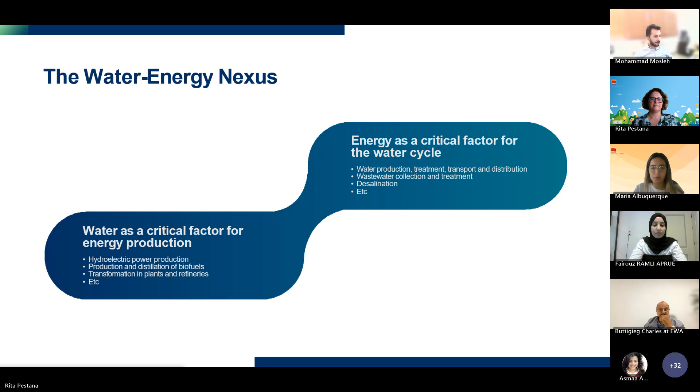So if we look now at the global situation related with the water-energy nexus, what we have is the fact that we actually have numerous factors that affect the quality, the quantity, and the variability over space and over time of the water that we have available.

Due to what? We have the effects of climate change, and in here we include not only the increase in global average temperature, but also the modification of precipitation patterns all around the globe, and as well the increase in the frequency, intensity, and impact of extreme weather events. And in here we include droughts, floods, or for example, heat waves.

Another factor that affects water is the increased consumption and competition for water. On one hand, we have a growing population. We have new economies, new sectors developing. On the other hand, we have also migration, internal migration to urban centers. So the geographical patterns of water demand are actually currently changing.

The third big factor that affects water availability is the increase in pollution. We know that according to UN Water, only around 60% of water bodies assessed in 89 countries in 2020 actually had good water quality. On the other hand, around 40% of all domestic wastewater around the globe is actually not treated properly and thrown directly into water bodies.

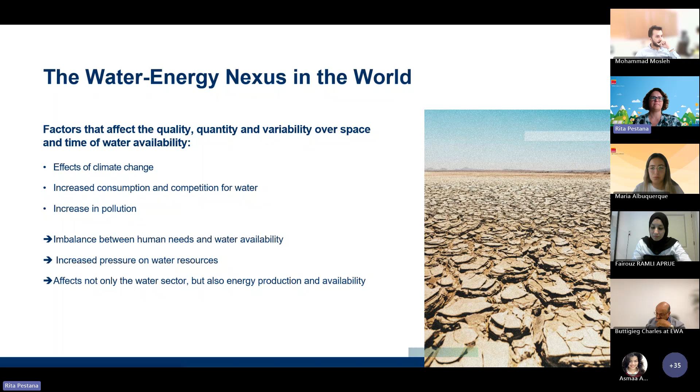If we look more specifically at the Mediterranean Basin, it is already a region that presents water scarcity at the moment. I'm talking in general about the region, not specifically any country. Usually we have long summers, which often have long drought episodes, but that then alternate with autumns or winters that have intense rainfall. And we have as well areas where groundwater depletion is already a factor, and rivers that already have low flow problems.

This adds to all the climate change effects we just talked about, to population growth, to a growing economic demand for water, and therefore a growing competition for water between different sectors, and the fact that the Mediterranean countries still strongly rely a lot on fossil fuels.

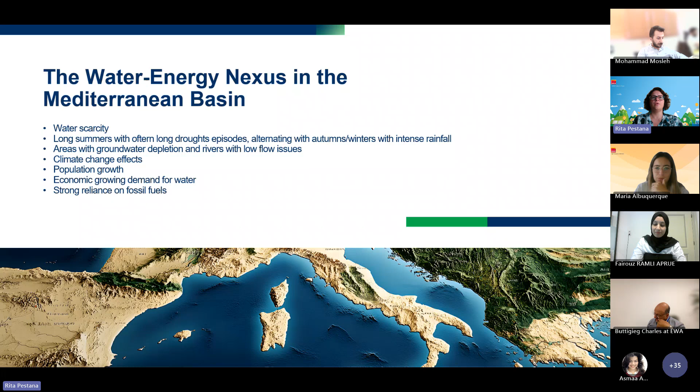Taking this context into account, we understood it as very interesting and useful to develop a methodology that would actually act on the water-energy nexus at the buildings level for the Mediterranean Basin. This methodology is named the Water-Energy Nexus Evaluation Methodology for the Mediterranean Basin, a long name.

It was developed by ADENE, the Portuguese Energy Agency, on the scope of meetMED 2. The aim is to assess and promote the adoption of measures that reduce energy and water consumption, on the scope of this water-energy nexus and the dependency between these two factors, while enhancing the resilience to climate change on Mediterranean buildings.

So what we look at in this methodology are actually three dimensions: the water efficiency dimension, the water energy nexus dimension, and the local climate adaptation dimension. When we look at the local climate adaptation dimension, we look specifically at climate risks that actually affect the production, abstraction, distribution, and use of water. So we're talking here about droughts, floods, coastal floods or riverine floods, and heat waves.

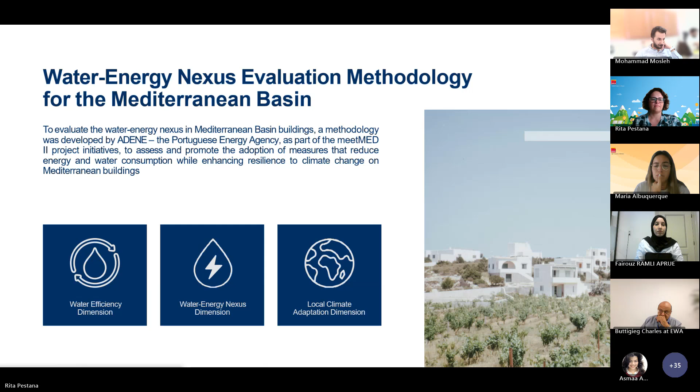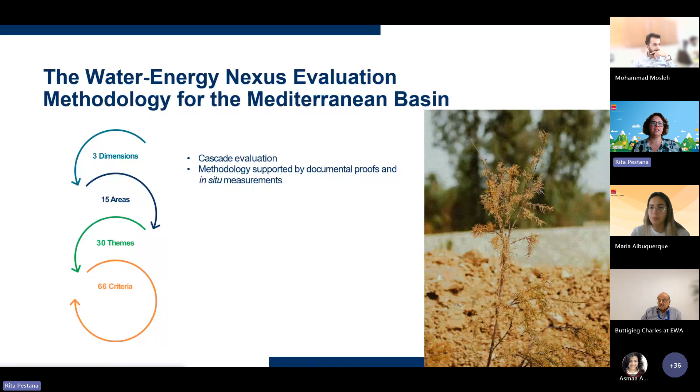To give an idea how the methodology actually works: we start with the three big dimensions - the water efficiency dimension, the water energy nexus dimension, and the climate adaptation dimension. Within each dimension, we have several areas of evaluation. Then we go into smaller themes within each area, and then within the themes to the specific criteria that are actually the questions we need to answer in order to apply the methodology. So this is a cascade type of methodology evaluation.

We go deeper into the details, and the methodology is always supported by documental proofs and in situ measurements. By documental proofs, we mean technical documentation, energy labels, proofs of purchase of all the equipment, fixtures, or systems related with the production, distribution, and uses of water within the building. And in situ measurements always happen when the methodology is applied to a building that is in use, constructed, and it can be measurements or photographs of certain features of the equipment. So we always need documental proofs and measurements to actually apply the methodology.

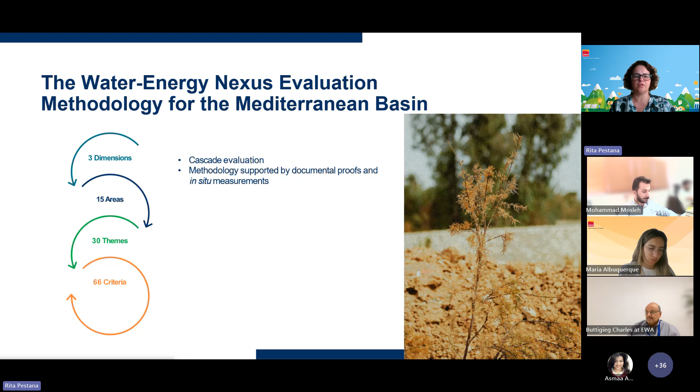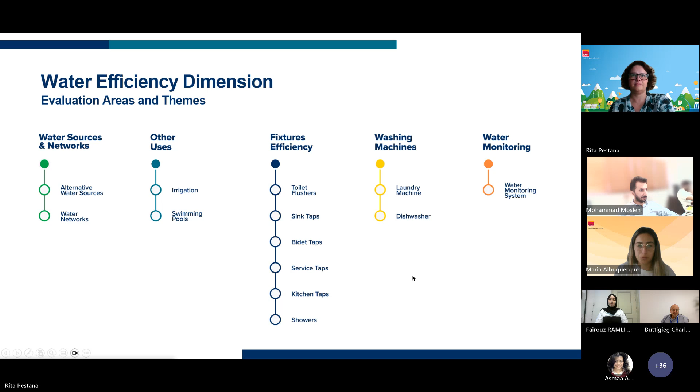Taking a look now at the water energy nexus dimension, it has a similar structure in terms of areas - similar equivalent areas to water efficiency. But here we're trying to assess the energy that is related to water uses. So, for example, in water sources and networks, we're looking at pumps that help with the circulation, distribution and use of water, and also at whether there are renewable or alternative sources of water and how they are supplied.

Is it using an electric pump? Is it using gravity - a system that allows your water to flow without spending energy? So we look at this type of point.

The same for irrigation: we look at electric or non-existing pumps used for irrigation. If a swimming pool exists, we look at energy and maintenance, and at specific parameters related to indoor swimming pools. Concerning fixtures, we look at the pressure and head loss of the building's network.

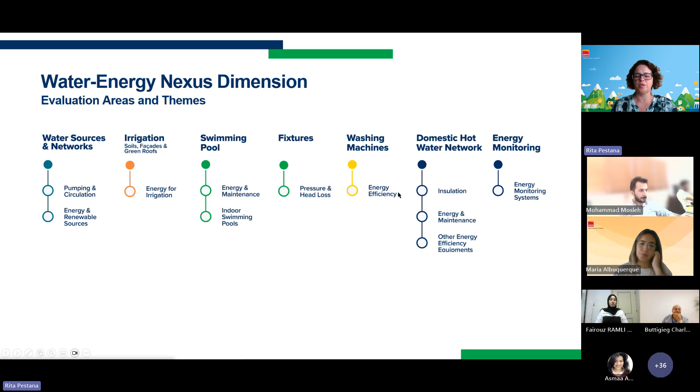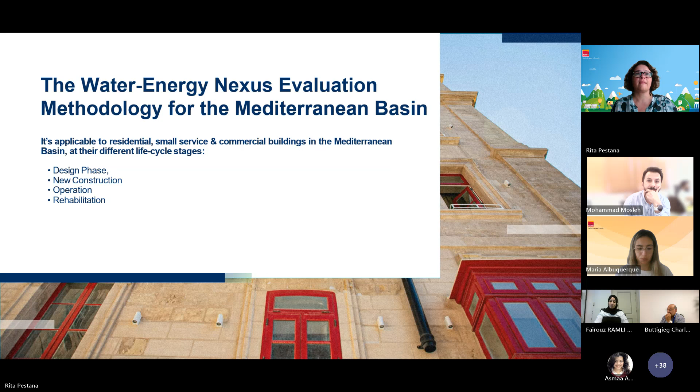So when we apply the methodology, we'll have scores and classifications at the end. These scores and classifications reflect the efficiency of the building on the 3 dimensions, and also a global efficiency classification.

So how does it work? We have 66 questions, so we answer all these questions, and each question has a weight and will give you some score that's added to the total score of the dimension. Each dimension will have a value between 0 and 100.

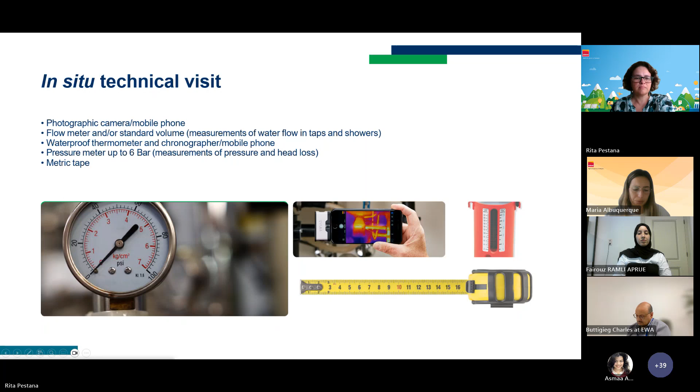Okay, just to have a better visualization of the methodology, I'll show you some prints of the evaluation matrix. So first, as I mentioned before, you need to fill in the matrix with the current situation of the building.

You'll also have tables to fill in technical data of fixtures and any other water-related equipment and systems existing in the building. This could be different types of electric pumps, water pumps, circulation pumps, or the model and characteristics of washing machines, etc., if the information exists.

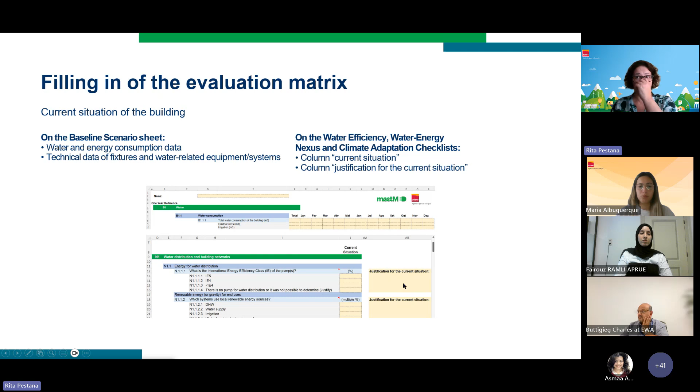You'll answer the column 'current situation,' and then put some justification for what you answered in this column, justification for the current situation.

After doing that, you'll select a maximum of two to three infrastructural improvement measures for each of the dimensions, and then introduce them on the checklist.

So how do you do that? You select the measures and look at the column 'situation after improvement measures,' and register the ideal situation here—as if the building already had the improvement measure implemented. You put some notes on the observations about the proposed improvement measures column, just to justify why you selected it.

And why do you do this? Because you'll have another sheet in the Excel file, the summary of results, where you can see all the scores and all the classifications for the building.

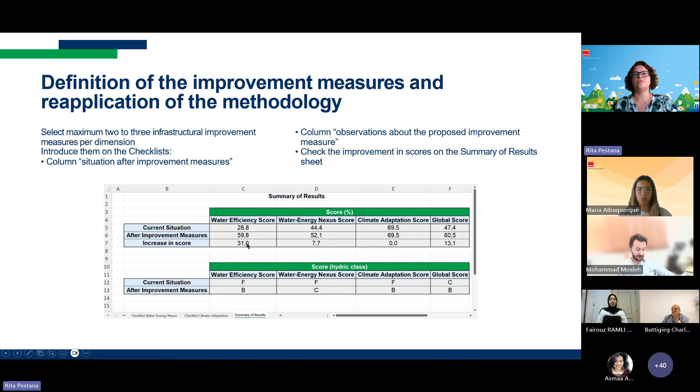So you can actually play around with the checklists, trying to select different sets of improvement measures that you think are adjusted to the building and that can improve its efficiency. You can check these tables to see how much the increase in score is for each dimension and for each selected set.

The bigger the increase in score, the higher the increase in efficiency in each of the dimensions. So this is the way to fill in and apply the methodology, and to help guide you to choose the best set of improvement measures for the building.

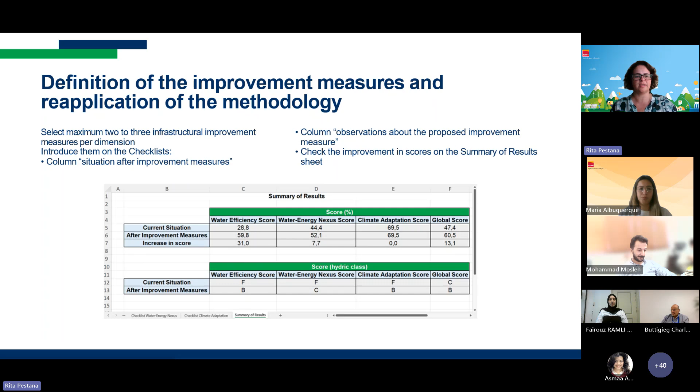The next speakers will give their results and experience just after my talk. What happened is they applied the methodology and gave us feedback, and according to it and the specific contexts, the methodology was adapted and adjusted.

And while doing this, we made a compilation of all the recommended improvement measures for all the different dimensions.

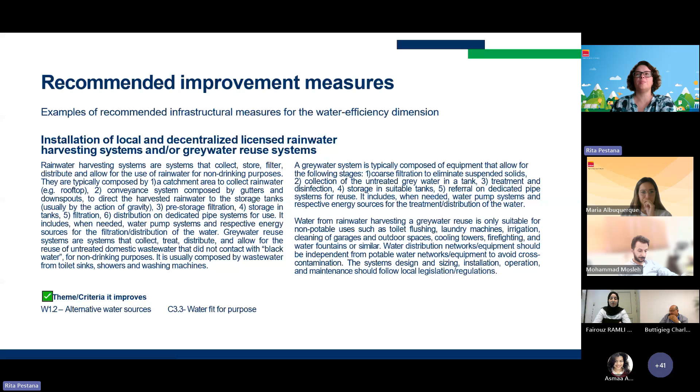And recommendations on the conditions to actually implement the measure. Concerning the methodology, you also have information on which themes or criteria the implementation of this specific improvement measure will improve. For example, installation of local decentralized rainwater harvesting or grey water reuse systems will act on the water efficiency dimension, on the alternative water sources theme, as well as on the climate adaptation dimension, on water fit for purpose. So you have information on which dimensions, themes and criteria each improvement measure will act on.

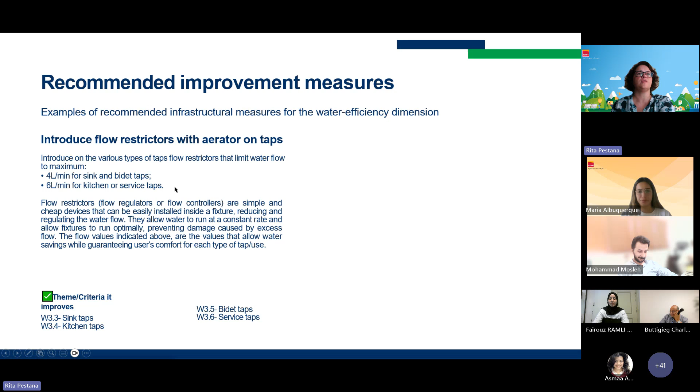Another example of a recommended measure for the water efficiency dimension is the introduction of flow restrictors with aerators on taps. This is a simple and inexpensive measure that will help limit water flow to maximum recommended values.

Another example, for the Water-Energy Nexus dimension, is the implementation of efficient water elevation or circulation pumps for adequate and stable pressure head loss values on the water network. Again, a smaller description, with the themes and criteria it directly improves.

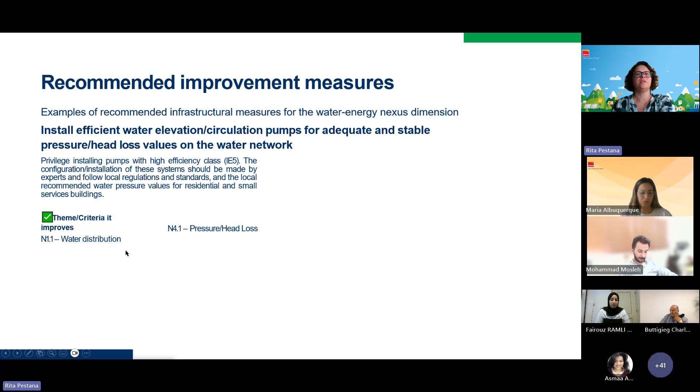Another one for the Water-Energy Nexus dimension would be to privilege gravity and renewable energy sources concerning water distribution, instead of using active systems that use non-renewable energy.

Two examples for the climate adaptation dimension would be the introduction of blue infrastructures in outside gardens, such as rain gardens, or the increase of permeable areas and placement of permeable flooring outside.

This development of the methodology was possible because there was implementation and testing on pilot buildings in Morocco, Jordan, and Algeria. I'll go quickly through this as the next speaker will talk more specifically about it. This is the public building in Jordan.

They've applied the methodology on a primary school. I will not go into the details, just let you know the logic of the methodology. The baseline scenario made in the beginning was to see which building characteristics and technical characteristics were related to water.

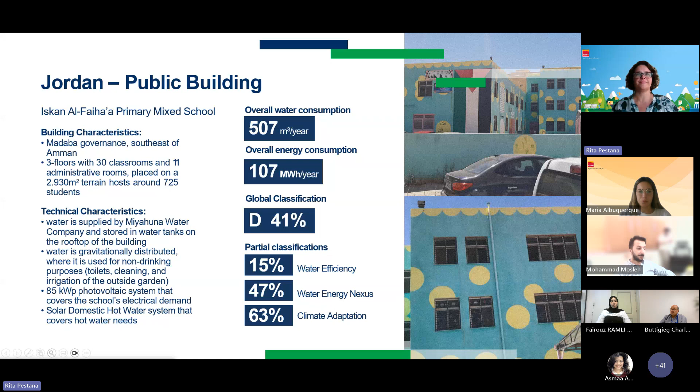Then a set of improvement measures were defined, with the main benefits identified as well, and the monitoring strategy also defined.

By reapplying the methodology, introducing the selected improvement measures on the Excel file, we had an increased global classification and new partial classifications, which were obviously higher than the ones for the current situation.

Our colleague Mosleh will soon explain better the state of the situation at the moment, but they are now implementing the improvement measures and will soon start monitoring.

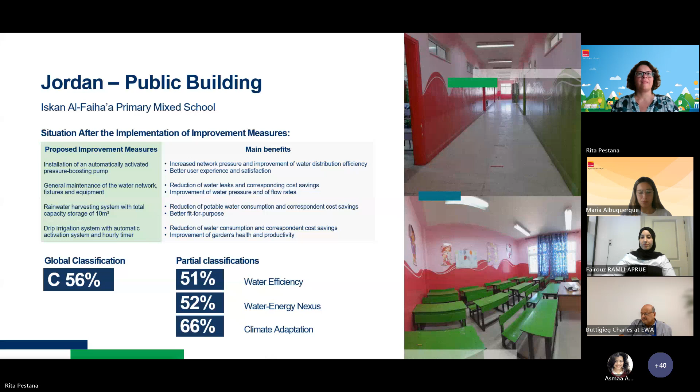I will talk to you, as an example, about one collaboration we had within meetMED 2 with another activity, activity 3.2.2, reaching twinning agreements and implementing study tours for city officers, which allowed us to give cities the opportunity to test and implement the methodology.

One of the cities that did this was Palmela, in Portugal. One of the buildings where they applied the methodology was the Poceirão Cultural Center.

They analyzed the building characteristics and technical characteristics. In this case, the building uses are solely 8 toilets and 1 kitchen. It's a building used for cultural activities and presentations, and the relevant water use equipment is solely the electric domestic water heater.

For the current situation, they made the overall water and energy consumption and applied the methodology, resulting in a global classification of C, 47%, with 29% on the water efficiency dimension, 44% on the water-energy nexus dimension, and 69% on the climate adaptation dimension.

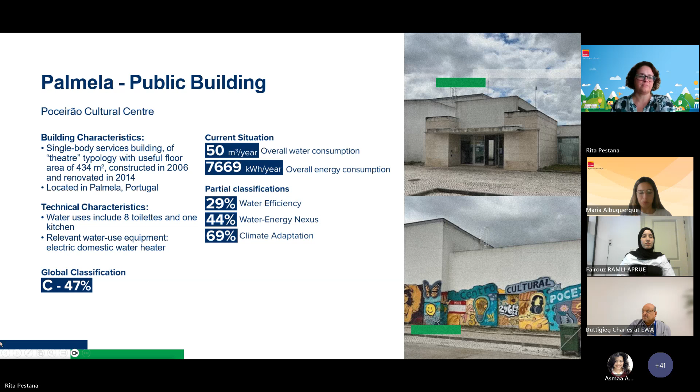So they've selected and tested on the Excel file different sets of improvement measures. These were the ones that were selected. In the case of this collaboration with the Twinning activity of meetMED 2, there's no actual implementation of the

equipment or systems on the building, just a test to see what could be the priorities if in the future there's some rehabilitation of the building or equipment. So they've selected 5 improvement measures. One of them, for example, was replacing the existing water meter with a new one that helps record daily consumption data and has an alert system to better monitor the use of water and easily detect any water leak. They've also decided on replacing taps, showers, toilet flushers and other fixtures in bathrooms and kitchens with more efficient ones with lower flow rates and aerators to limit the flow, and the installation of a rainwater harvesting system, for example.

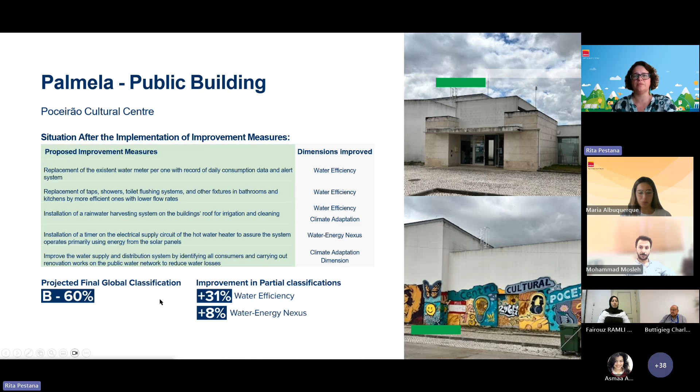So who can apply the methodology? Actually, the methodology can be applied by any energy or water specialist, as well as technical experts from energy and water agencies or from municipal, local, and regional authorities.

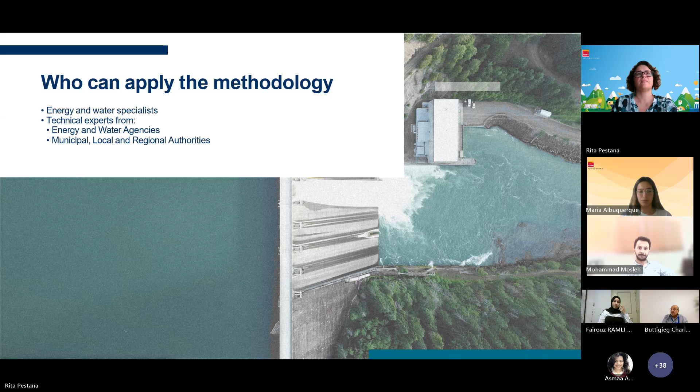I just would like to let you know about this deliverable that will soon be available on the meetMED website. That's the Green Guide for Buildings Water Energy Nexus. It gives you contextualization of the water energy nexus in the Mediterranean region, explains the development and functioning of the methodology, and includes a compilation of the most common and recommended water energy nexus improvement measures defined and compiled within this work.

Then we'll have a section on the application of the methodology in the Mediterranean countries, with pilot buildings from Jordan, Algeria, Morocco, and Palmela. Just to let you know, from the compilation we made, we identified 16 measures for water efficiency, 10 for water-energy nexus, 3 for the climate adaptation dimension, and a set of 8 behavioral measures developed within the scope of this activity, helping to develop material that was applied just some days ago in Algeria and Jordan in school campaigns.

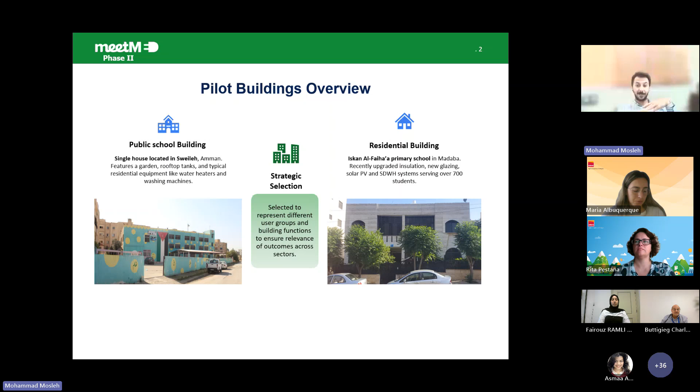These two buildings were selected to reflect typical water and energy use patterns in Jordan, one from the residential sector and one from the public services sector. The selection was made according to agreed criteria, including building type, data availability, accessibility, and improvement potential, which made them ideal for applying the methodology and testing it under real operating conditions.

To fill out the tool, we needed a combination of field measurements, utility data, and desktop research. First, we collected 12 months of electricity and water bills for each building to establish the baseline. Then we measured flow rates at taps and showers using a simple method with a bucket and a watch, and used a manual pressure gauge to measure pressure at key points across the internal network. We also did a visual inspection of fixtures and internal piping to identify leaks, inefficiencies, or damaged components, and recorded technical specs of equipment like water heaters, tanks, and pumps, mostly from the nameplates. Finally, for the climate adaptation part of the tool, we relied on desktop research from national strategies and official reports to identify risks like heat waves and water scarcity that could affect building performance.

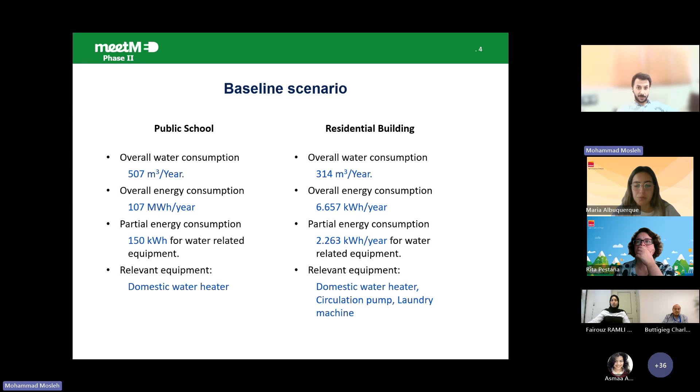Based on the assessment and the tool's results, we selected and implemented a set of tailored measures in the public and residential buildings. For the public school, we started by installing a booster pump, which solved the low pressure issue in the upper floors, especially the second floor classrooms. We also set up a drip irrigation system with an automatic timer to replace manual watering, improving efficiency and reducing water waste in the garden area. In parallel, we conducted maintenance on the internal water network, repaired some minor leaks, and added tap aerators on several fixtures to reduce flow without affecting performance.

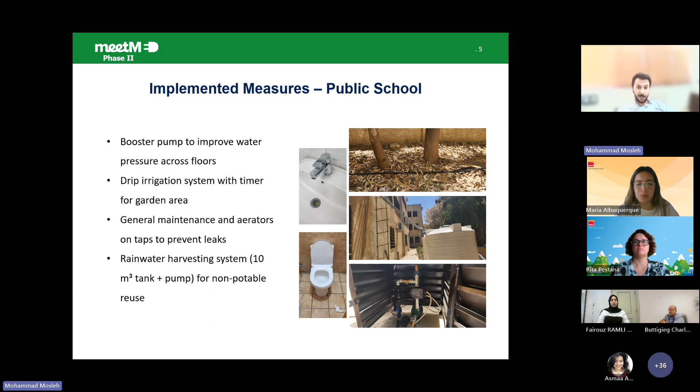Finally, we installed a rainwater harvesting system, including a 10 cubic meter tank divided into two tanks, a filtration unit, and a pump to supply non-potable water mainly for irrigation. All these measures have already been implemented at the school, and you can see a few photos here of the actual systems in place.

In the residential building, we selected three practical measures tailored to the size and needs of the household. First, we installed a solar domestic water heater with a capacity of about 200 liters, to replace the electrical heater and reduce electricity consumption related to water use. Second, we introduced a drip irrigation system with a simple timer, as we did in the public school, helping improve water management for the small garden area and reduce manual watering. Finally, we added tap aerators to the kitchen and bathroom taps, a low-cost measure that reduced flow rates without compromising user comfort.

It should be noted that these measures were selected based on feasibility, cost effectiveness, and their expected contribution to improving the building's water energy performance. So here's some results showing before and after in school.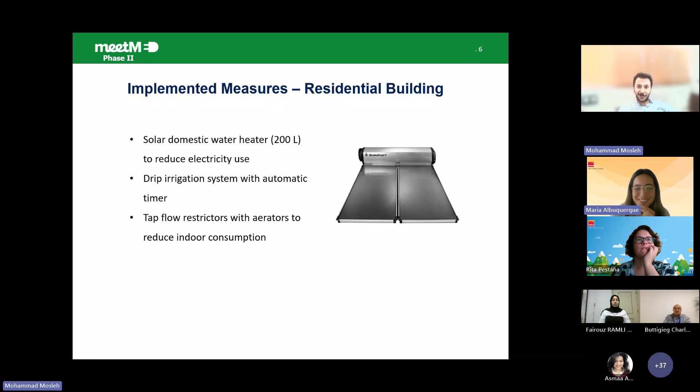Okay, here's the residential, I guess I mixed them up. I'm not sure if it's turning... Now we are seeing the PowerPoint. Just wanted to make sure we are saying the right figures. So again for the public school, where is it? Can you see it or not? Right now we are not seeing the PowerPoint. Just give me a minute. Can I stop share and just do again? Yes, share again. Laptop issues. So can you see it now? Not yet, I don't know if it's loading. Okay, what about now? Yeah, now we are seeing it.

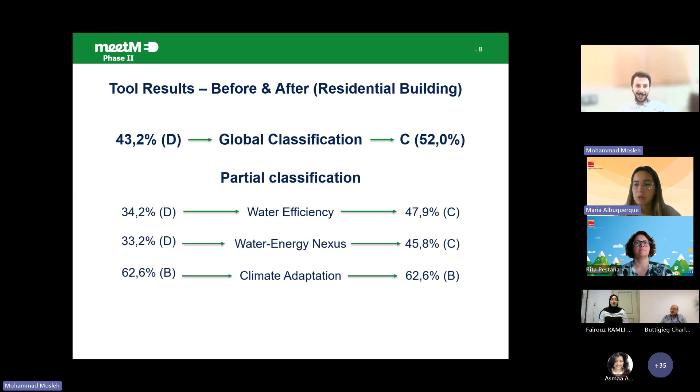I still have the same issue, it doesn't move, sorry my laptop needs some... It's okay if you think it's good to stop sharing and start sharing again, if you prefer. Okay, it can help. Can you see it now? Not yet, probably still loading. Old laptops. It's normal, we have the facility to do webinars but technical problems are always present. Thank you for your patience.

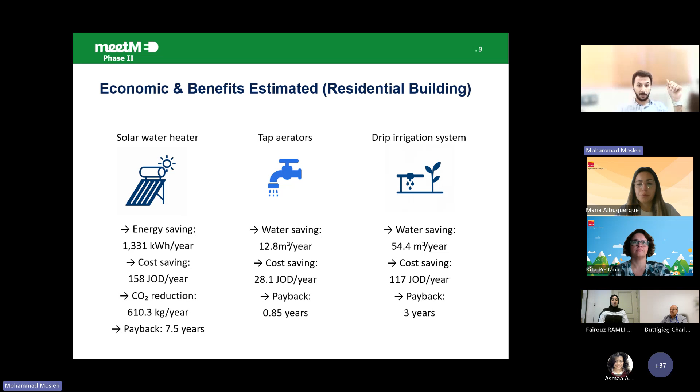Yes, okay. And the tap aerators, through a low-cost measure, still save around 13 cubic meters per year with a very short payback of less than a year, about 0.85 years. In the public school, the drip irrigation system and the network maintenance with aerators led to combined savings of over 170 cubic meters per year, with a payback ranging from 1 to 5 years. The rainwater harvesting system, while beneficial, has a longer payback, about 24 years, but it adds value in terms of resilience and reuse.

Overall, these numbers helped us build a clear picture of the economic and environmental benefits, and strengthened the case for wider adoption.

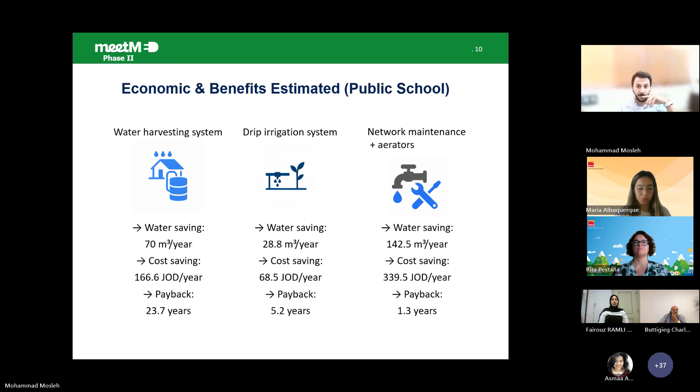So last but not least, I would say that last week we conducted an awareness campaign at Sampayha Primary School as part of this activity. The campaign focused on basic water and energy conservation practices, as well as introducing the Water-Energy Nexus concept in a simplified way for primary students.

We reached more than 500 students in addition to teachers and staff. And I'm glad to share with you that we also received very good positive feedback from the administration and the Directorate of Education in Madaba, which expressed strong interest in expanding this kind of initiative in the near future.

So please allow me to thank Asma for her great support and collaboration, and our colleagues in EWA for their huge efforts preparing the awareness materials. Their efforts actually made it accessible, fun, and very impactful. This experience really highlighted the importance of pairing technical interventions with clear communication and education, especially when working in schools.

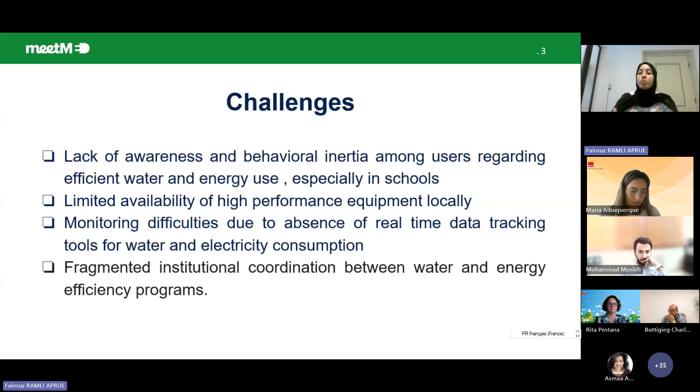Also, one of the main challenges we encountered during our work was the fragmented institutional coordination between water and energy efficiency programs. It's common that the energy sector works on energy efficiency and energy transition, while the water sector works on water separately. Thanks to the methodology led by ADENE and exchanging experience with Jordan, Morocco and other countries, we were able to highlight the importance of the Water-Energy Nexus.

First of all, we set objectives for this project, such as applying the Water-Energy Nexus approach to foster cross-sectoral synergy and renovation efforts with other actors, also to reduce water and energy consumption using integrated and efficient systems, and to promote educational engagement.

Building a culture of sustainability in schools and other public buildings, because I believe this kind of project is not only about the technical part, but also about building ownership and responsibility among the users, and contributing to our climate action goals through tangible improvements in resource efficiency.

Well, I will start with the public building, which is a school in Boumerdès, Algeria. Its land area is about 1,200 meters. It's an old school with double brick walls, and conversely to the Jordanian pilot building, our pilot building was poor in energy efficiency measures.

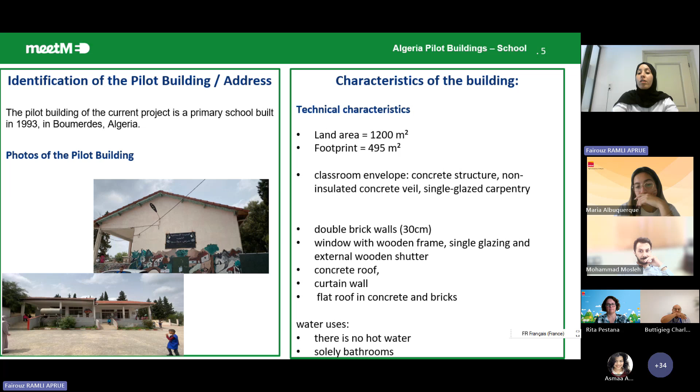So we started with water efficiency measurements at the school, and we ended up with energy measurements too. It was an opportunity actually, because when we started work, there was a renovation project for this building, and we had a chance to talk with the company and the municipality about how important it is to integrate these measurements—not only for the water-energy nexus led by the methodology, but also by improving the double glazing and the insulation, and leading a communication campaign to ensure long-term pilot building sustainability.

Baseline scenario of this school: overall water consumption was 37.3 cubic meters per month, and overall energy consumption was 2,294 kilowatt hours per month.

It's a kind of small school, but it's important for the area where we analyzed it, because it's the only school in that area, in a small town in Boumerdès. So it was a very important school to the municipality.

For the methodology highlights, the global classification was 10.1%, grade F, showing how poor the energy and water efficiency was in that school. For the partial classification: water efficiency was 16.3%, grade E; water-energy nexus was 3.7%, grade F; and climate adaptation was 10%, grade F.

After the measurements were selected for the school—just to highlight that there were a lot of measurements selected by the methodology with several impacts—we tried to choose impactful, low-cost, high-impact measurements available according to the activity, but we kept a long-term action plan for the coming months with the municipalities.

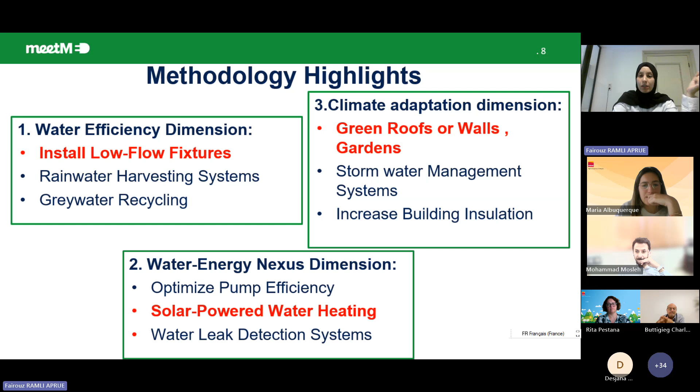For the water-energy nexus dimension, we selected solar powered water heating for the school. It wasn't only about equipment installed on the roof, but something that could have an educational impact, essential for the children, yes.

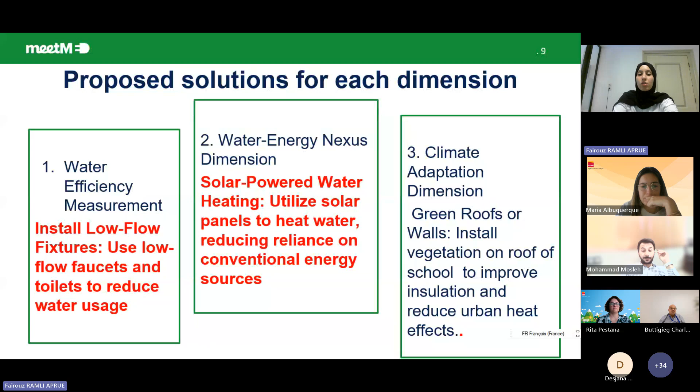The proposed solution for each dimension, as I already mentioned, is low flow fixtures, a solar water heater, and more gardens. These are real photos of the school where we installed the solar water heater and the two types of low flow fixtures.

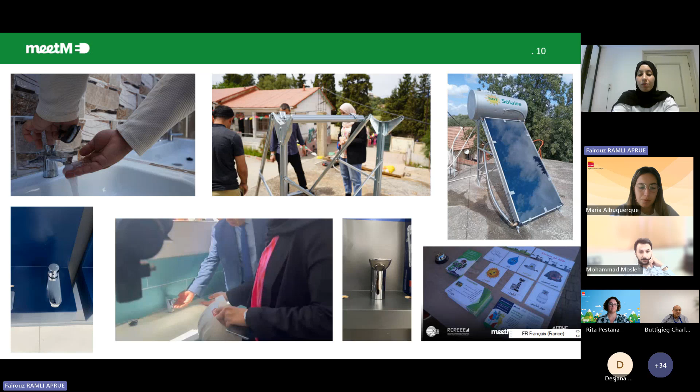We selected one temporizer with less than 10 seconds, to raise awareness among users that water has its time—it's not for all the time. The other one used infrared, so water can be used only when needed. So it was really selective equipment, not only for the technical part, but also for raising awareness.

We had this opportunity of the Green Day in collaboration with RCREEE, ESMA, ADENE and EWA, not only for the teachers and staff and pupils, but also in presence of all the municipality stakeholders, the direction of energy, direction of education, and different actors like the National Agency of Water and National Agency of Recycling, to have all these actors of this thematic for water energy efficiency. We had the opportunity to explain our application of the methodology led by ADENE, and also to raise awareness and achieve behavioral improvement through interactive action and sessions with all the users.

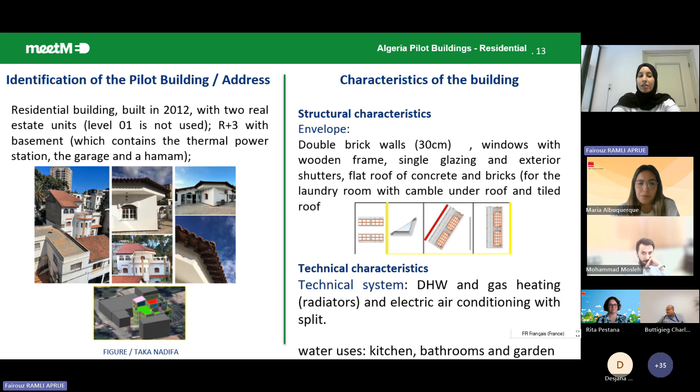For the second pilot building, it was a private building built in 2012 with 3 floors, also double brick walls, single glazing. It wasn't that much energy efficient. We didn't have that many energy efficiency measures, but as I already said, it was the opportunity to start work from the beginning and see the impact.

Of the methodology, overall water consumption was 16 cubic meters per month. Overall energy consumption was 135 kilowatt hour per month. Partial energy consumption for water-related equipment was 35 kilowatt hour per month. The relevant equipment related to water use was the laundry, the pumping, and several other equipment that you can find in the guidebook.

The methodology highlights that we had the global classification 18.5% E. For partial classification, water efficiency was 23.1% E, water energy nexus 12.2% F, and climate adaptation was 20% E.

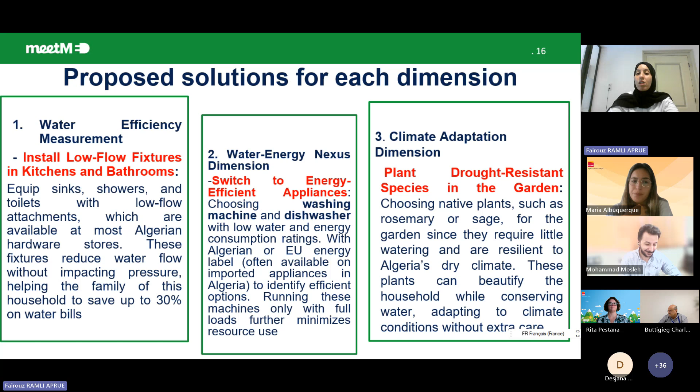For the proposed solution for each dimension, as I already mentioned, the selected measures were chosen according to the timeline of the activity, favoring low cost, high impact measures, but we also had a long-term action plan for further improvement. We installed low flow fixtures in kitchens and bathrooms, switched to energy efficient appliances like washing machines and dishwashers, and for climate adaptation, we planted drought-resistant species in the gardens.

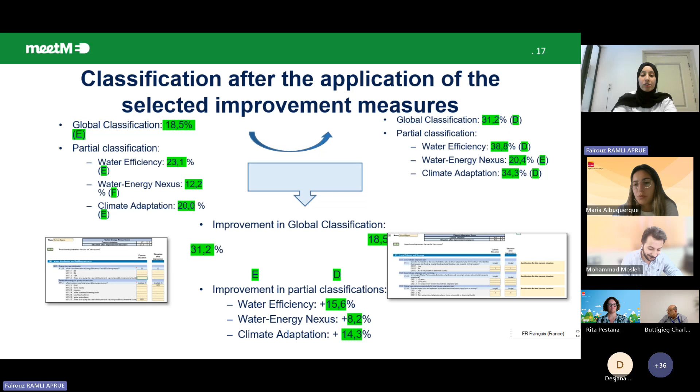We had improvements of plus 15.6% for water efficiency, plus 8.2% for water energy nexus, and plus 14.3% for climate adaptation. The benefits of the application of the methodology and all the work done during this month - not to bother you with technical details, but I will describe it briefly.

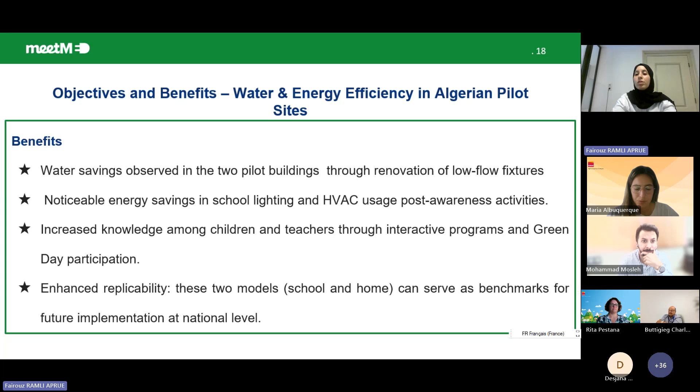We observed water savings in the 2 pilot buildings, noticeable energy savings in school lighting and HVAC usage post-awareness. The methodology helped us raise awareness among the users, increase knowledge among the children and teachers, also the municipality, and enhance replicability. So these 2 models can serve as beneficial pilot buildings for future implementation at national level. Now with the APRUE team, we're preparing to implement more pilot buildings using this methodology.

For the opportunities after this work - our problem or challenge in this type of project was, from the beginning, how to have all the actors related to energy and water thematic involved. It was an opportunity to have all these actors undergo training for the municipalities, explaining the real impact through this kind of project.

Not only for the technical part, but by improving the national action plan among the municipalities, explaining how more jobs in this kind of project can help not only the technical part but our economy, with more collaboration from national institutions like the National Agency for Water and Recycling and the National Agency for Energy. We also had collected more engagement from civil society.

We were contacted by an association named Torba, which offered a 1 year education program for the students about climate adaptation, involving more planting that helps water efficiency and savings. It was very beneficial work with activity 3.13 and with all the team, and I'm so honored that we got on stage and had the chance to present it to all the public audience.